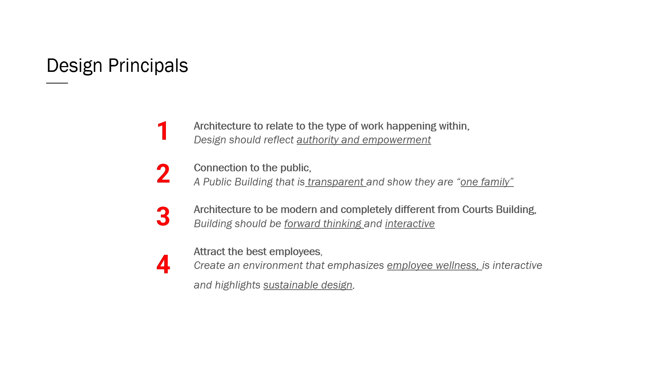So first I was given the problem. I was mentioning to someone earlier today that as an architect, I don't see myself as a builder or a designer. I just see myself as a problem solver. And the problem that they gave us was, let me see if I can get the pointer to work.

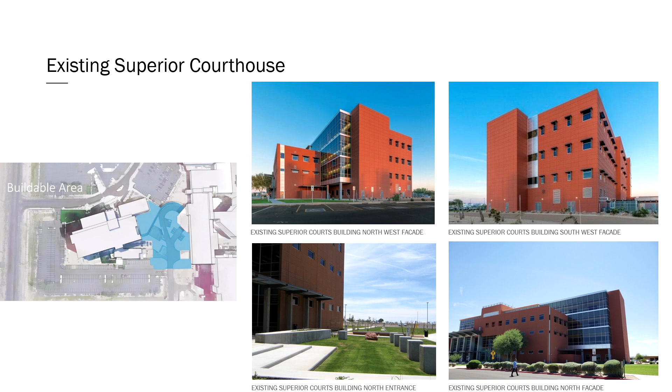One thing we look at with sustainability is what I call right siting and right sizing. So I need to make sure the building sits on the site correctly in its orientation to help reduce solar heat gain, accentuate the natural daylighting, simple basic tactics, but also right sizing, which is looking at the building and making sure we're not overbuilding this project, wasting space, wasting area that needs to be heated, cooled over time.

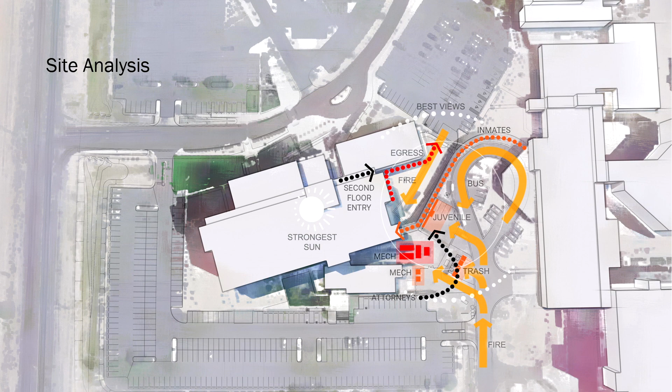So at DLR Group, we have a high performance design team, and I leverage this team on every single project I have. These are some of the complexities of that site. There's a bunch of vehicular areas, mechanical areas, and in order for me to build a 5-story building in that spot, I'd have to build it up on stilts, and it became more complex.

So I had to convince the client that building a building on that part of the site was not possible, and if it was to be there, it's going to be more expensive, not only to construct it from the beginning, but also the life cycle costs were going to be higher due to its orientation and location. So these are just some of the stats that I use with my high performance design team to look at daylighting studies and energy modeling.

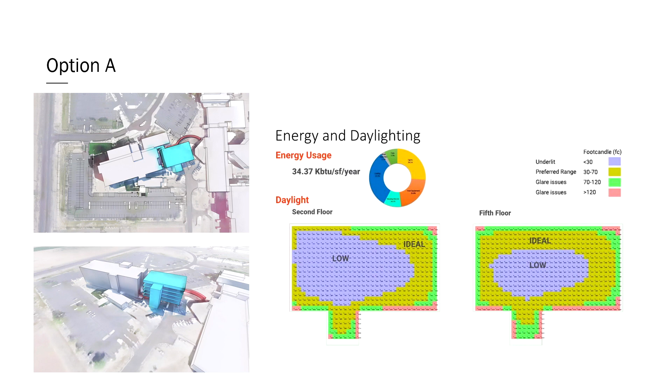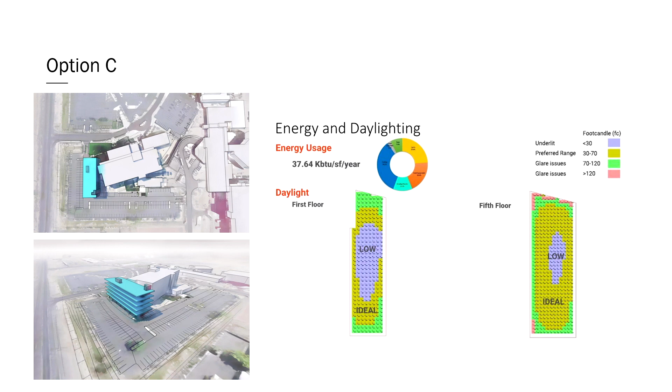We did several iterations, and then I looked at actually flipping the building to the opposite side of the courthouse. It needed to be connected to the courthouse. And this was in a parking lot that was an off-limit zone for me, but I figured if I can present some data to them that would actually save them money over the long haul of the building, they might bite on it and allow me to build the building there.

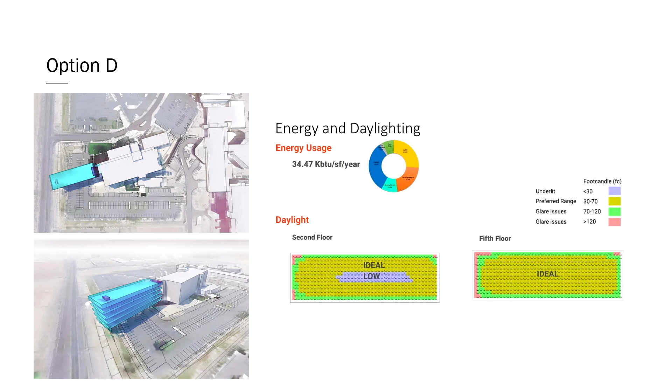As you can see on this last diagram, with the daylighting studies, we are getting low daylighting to the center of the building, but ideal daylighting to the perimeter of the building. And so as we started to do this with this data and analysis I was able to present to the client, they said, let's go for it, let's build it on this side of the building. So battle number one is won.

With a 5-story building in the middle of the desert, and the next tallest building is the courthouse next to me, and the next tallest one to that is only a 2-story building, so this thing was going to be really tall in the desert, and I needed to find a way to really connect it to the desert.

I'm an avid backpacker. I backpack a lot around the country, multiple times a year. And so I set off to do some hiking around the site, and I slowly started to see that in some rock formations, the shade of the rock formations was growing plants, vegetation, flowers. And I thought, wow, that's really interesting.

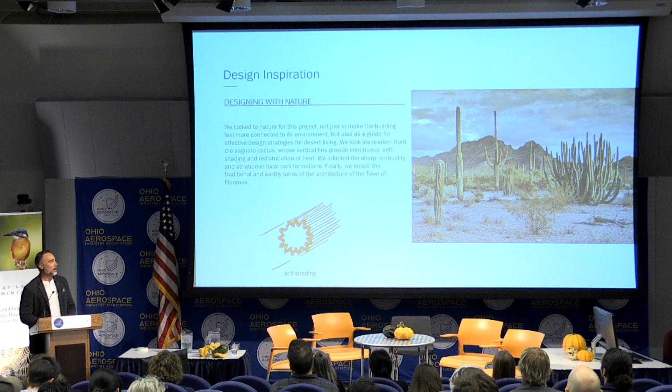Could I create a building that has these pockets of shade to allow people to enjoy amenity spaces outdoors?

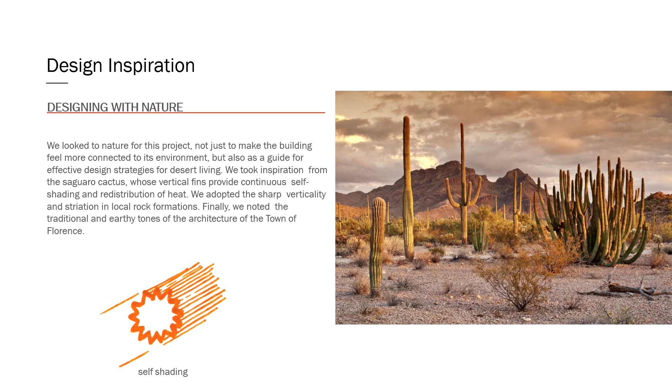As the sun passes around the saguaro cactus, it starts to self-shade itself with these vertical ribs. So I thought, can I create a building in the desert that's vertical out of the ground, but also becomes a self-shading building? So it's not so obtrusive to the landscape, but it's actually protecting the building as well.

So that's where battle number two came in, trying to come up with a design concept for the building. I looked at biomimicry and mimicking the saguaro cactus in its self-shading properties, and started to develop strategies on how I could apply that to our building.

We also started to look at money and where you put money on a project. This is very important because all projects have budgets. And when you're looking at sustainability and doing something completely different, clients usually run away from it. They don't want it—this client did not care about sustainability. So I said, if we have this budget, where can we put the money that gives us the most value?

So this is just a little diagram of where we thought we could put the money spent. On the east side, we're up against a courthouse, so we don't need to spend much money there—we're 6 feet off of it.

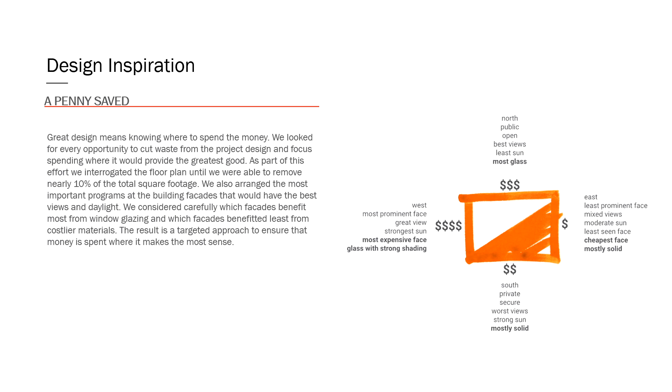The southern part of the building receives the most sun. I want to put some money there, but not too much. The west facade actually abuts a highway, so I really wanted kind of a wow feature there. And on the north side, it looks off to the Superstition Mountains, which are glorious purple mountains, so I wanted to make sure we get natural views out to the mountains.

So as I'm looking at the concept of the exterior, I'm also looking at right-sizing. This diagram shows how I work with my mechanical engineers. I have an integrated design practice where we have mechanical, electrical, structural, acoustics, and lighting all in-house in my firm, and we work together as a team from day one. They're part of my team to understand how to build the building and be smarter with what we're doing.

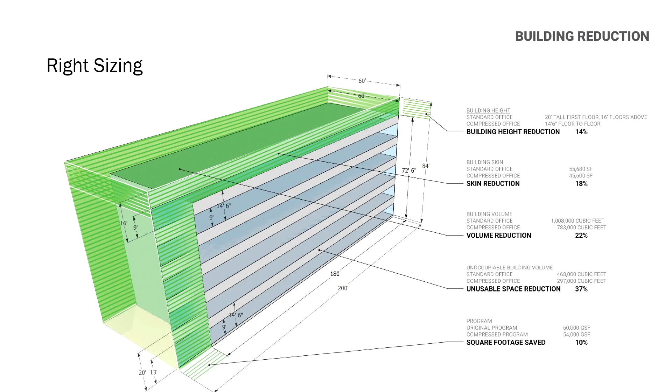So we start to look at reducing plenum spaces where all the lighting and mechanicals are housed. Typically that's 4 feet; we try to reduce it down to 2.5 feet. So I have to work back and forth with that team to reduce that.

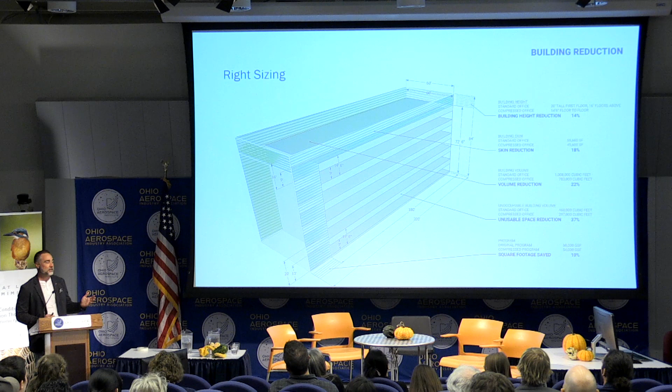We looked at working with the overall footprint of the building. If we can start to shrink some of the office space down, we can reduce the building by a certain percentage. Most offices have door swings that swing into the space, so we decided to go with a barn door. That way the door doesn't swing into the space, and we were able to save 1.5 feet per office, which helped reduce and shrink the whole footprint of the building.

As you can see with the diagram, when we shrink the whole building, you shrink the whole envelope, which reduces the whole construction cost as well as the building materials you're using. So you start to look at the carbon footprint of this building, and we're starting to reduce it slowly just by doing simple things with reduction of interior wasted space.

What we proposed on the project was that every single office was glass, floor to ceiling, opening to the corridor. This way, the natural light from the exterior can go through the office and into the corridor. And back with the energy model, you saw that it was ideal lighting all the way to the core space. So we put all the core of the building on the inside—the egress stairs, the restrooms, the elevators, the print rooms—most of the non-occupiable spaces at the core.

This building can actually function with no artificial light, and everyone has the right foot candles at their desk at the end of the day. That was a goal of ours to hit.

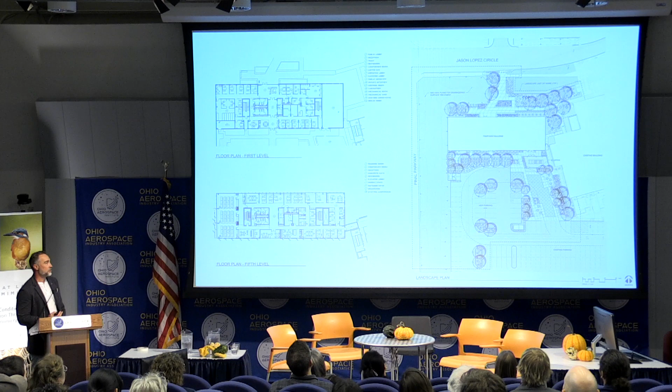You can also see the landscape around the building. We looked at the solar heat gain on the building from parking lots and surfaces like asphalt and concrete. If we can produce a 30-foot landscape buffer around the building, we can reduce the total solar heat gain on the building by 25%. So looking at the type of vegetation we can add around a building to reduce that is very beneficial.

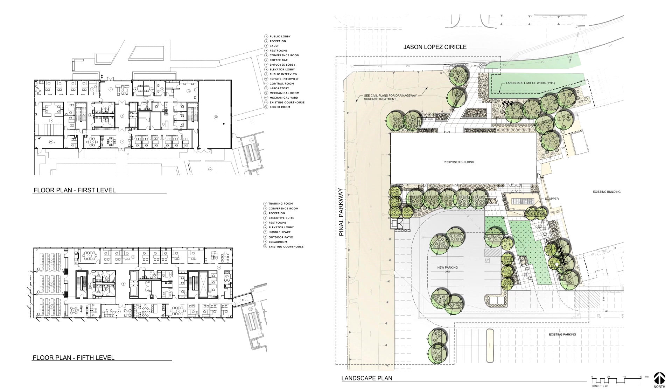One note I'd like to make is it's a really cool idea: there's a courtyard on the southeast corner of the project that's actually a fire lane. I worked closely with our sustainable landscape architect, and since we need a fire lane for all these buildings, we came up with a clever idea of creating a plaza area with grass called Grasscrete, that a fire truck can actually drive on at times. We're hopeful the building never catches fire, so it's never used as a fire access lane other than twice a year for testing. But this was another way to add greenery and soft space and help reduce solar heat gain around the buildings. Typically that space would be gravel or asphalt; in this case, we made it a plaza for employees to hang out.

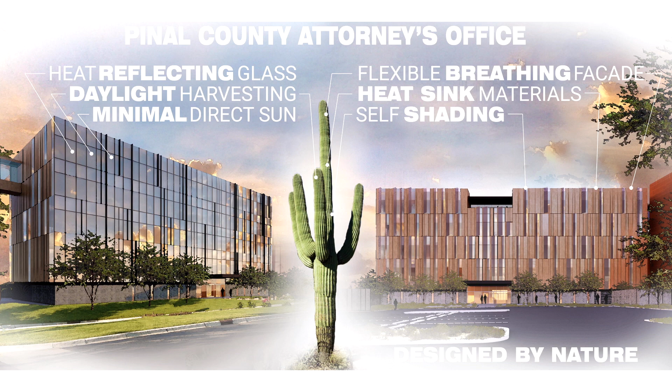These are some of the renderings we came up with early on. The north side of the building is all glass. We got a lot of feedback early on the project during community outreach asking why we're building a glass building in the desert. This glass is on the north side, so you're not getting direct sunlight except in the summer months at the very beginning and very end of the day. But with technology, we use a Solarban 90 glazing on the north side, which reduces the solar heat gain on the glass while still giving us stunning views of the mountain range to the north.

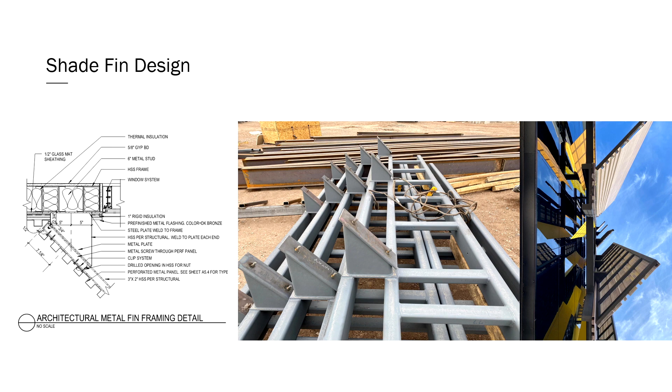The rendering on the far right is the southern part, where you can start to see the facade of the building. There are punched openings, and at every punched opening we decided to put a fin on the building. The fins become part of the solar heat gain reduction and self-shade the building. I'll fly through a few of these, but here are some construction photos of the fins. These fins are about 4 feet wide by 19 feet tall, very massive - there are 120 of them on the project.

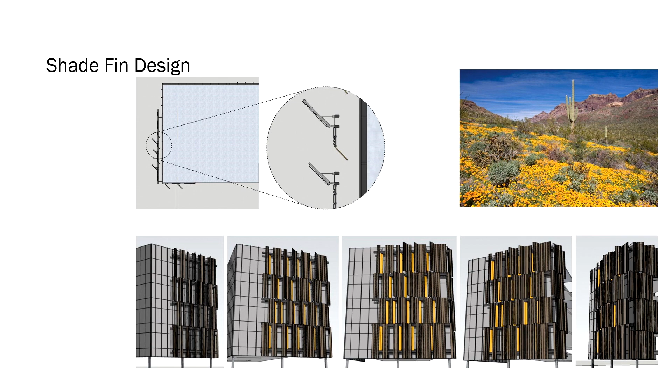When we started looking at the west facade against the highway, we thought about how the desert itself blooms once a year with spectacular colors in the saguaros, cactus blooms, and on the surface ground. So we looked at how we could create a facade on the west side that has a pop of color, but only happens at a fast pace. As you're driving your car past the building from left to right, you barely see any color. As you get dead center to the west facade, you get a really vibrant pop of color, and as you drive away it dissipates. It's a poetic move representing that quick pop of color the desert gives us once a year.

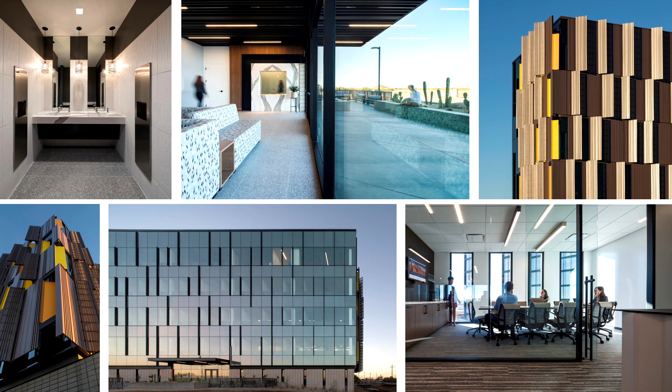I'll go to one more slide and leave you with this: that is the Pinal County Attorney's Office, and I looked at the saguaro cactus, a self-shading plant in the desert, as my inspiration to design the project. So thank you.